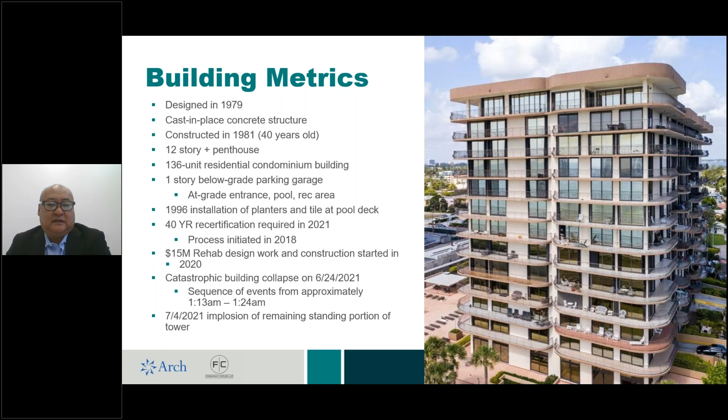You can change, next slide, please. This, well, go back one slide.

This is the building with the pool. The other picture didn't really show the pool, but you can see the pool deck to the left. And to the far left, you can see a new structure that was built, started in 2016. The significance of this structure next door will be understood later, but there was an allegation that the construction of the building next door, via installation of sheet piles, caused vibrations that could affect the Champlain Towers South building. That was actually never proven. There were no final reports indicating that was the case, but that was one of the theories of the cause of the collapse.

Next slide, please. The interesting thing about this project is that it was built in 1981, and there was a sister building built in 1982 called the Champlain Tower North. There was also another building built in 1994 called the Champlain Tower East, which is in between the two buildings. The 1982 Champlain Tower North building is very similar - you can see the footprint in the top right of my slide.

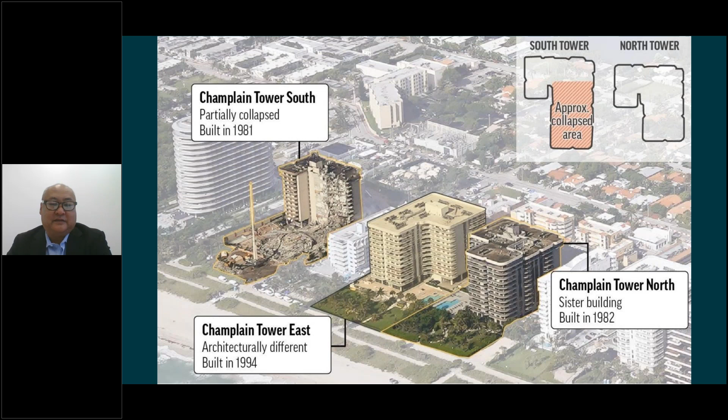So this is the building. There was basically a west tower and an east tower and the pool deck. The collapse occurred primarily in the area right where the pool deck is, and then the collapse occurred in the center between the west and the east towers. Eventually, the east tower collapsed sort of minutes later after the initial collapse.

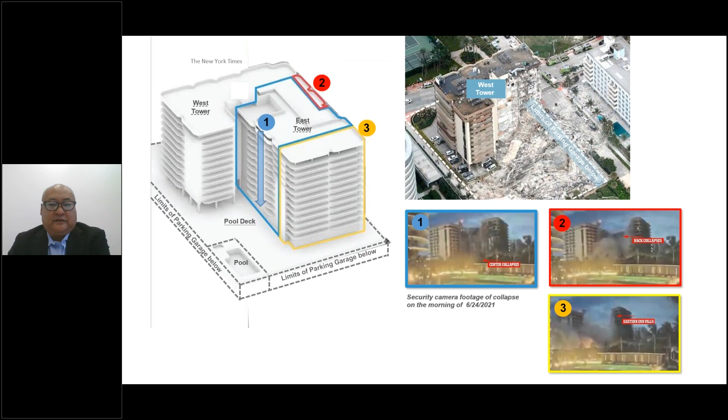I'm going to go through the information that we received through video. There was a security camera next door which actually has footage of the actual collapse. We took some video clips of it so you could see the mechanism. Essentially, the first part where you see number one, that's where the collapse began. You can see that in the second section in the back collapsed next, and then finally the third section of the east tower collapsed on top of the section that first collapsed. So that was the sequence of events with the collapse.

This is the slide that basically shows a model that was done. When I presented this before, we indicated the location of people who were actual witnesses who contacted the security desk and indicated to the security consultant or guard that they heard some construction. They were concerned about it. They thought maybe they heard some loud noises, felt vibrations.

This occurred, of course, at 1 in the morning. The collapse happened at 1:24 a.m. So at 1 a.m. in the morning, people are feeling something is going on. We'll show another video or picture of a person who was walking their dog at like 1 in the morning and actually saw something, which I'll show you in the next picture. But these witnesses are very important to the forensic people who were trying to determine the cause and what happened. The residents from room 111 actually, unfortunately, left their unit and moved to the security desk.

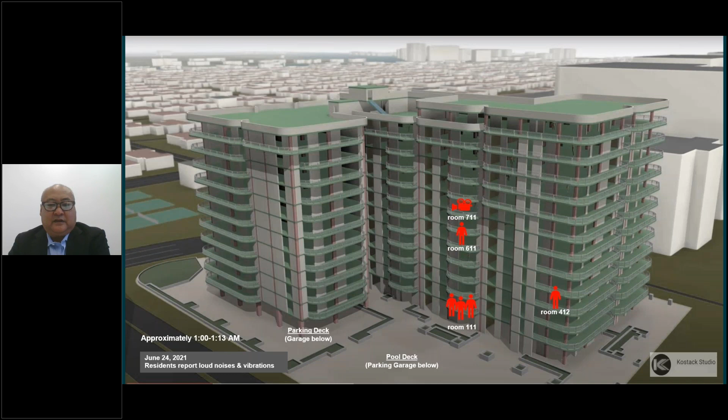The collapse, we understand, occurred right almost below room 111. There was also a condo camera in room 711 and 611, which we were able to get the video for. You can see the video pictures in room 711 in the top right, approximately at 1:15 a.m., about 7 minutes before the actual collapse. You can see that things are starting to move and rumble and change, and there were people who were obviously concerned.

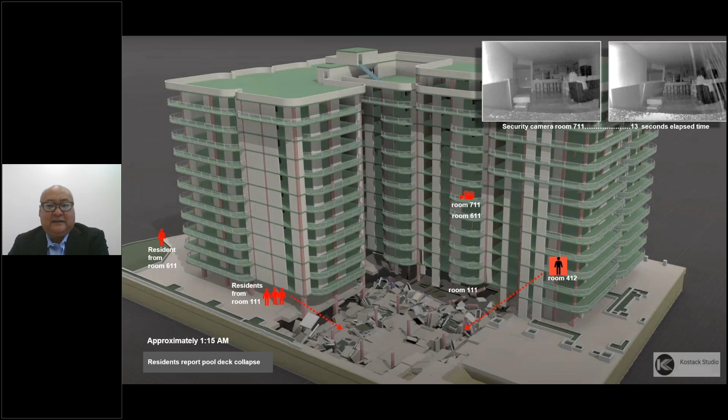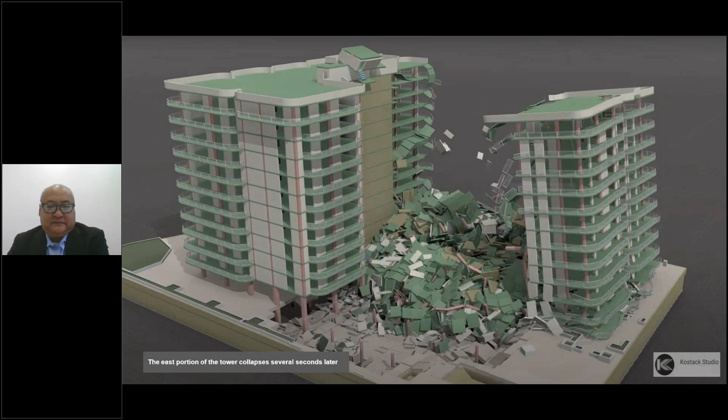When the collapse occurs at 1:22 a.m., it collapsed from the center. The pool deck had already collapsed first, and then the rest of the building went down afterwards. The section in the back goes down, and then the east tower collapses. This is an elapsed time of like 13 seconds, I believe.

So this is what it looked like the next day.

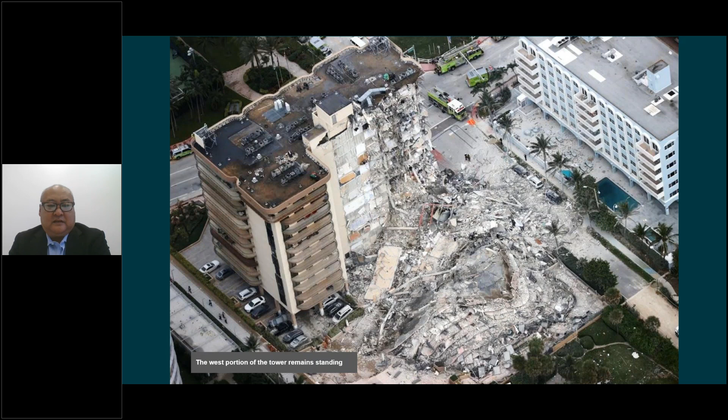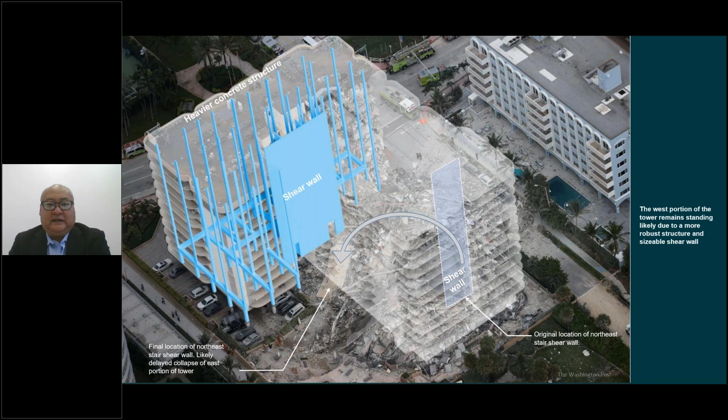When we looked at the building structurally, we noticed that there were two shear walls. The shear wall on the left side of the building is much more significant and substantial. It is probably the main reason why the west tower did not collapse during the collapse of the east tower. From the next photos, we'll show you where we think the collapse actually occurred. The witnesses found that the initial failure zone was on the pool deck, and we have some interesting photos.

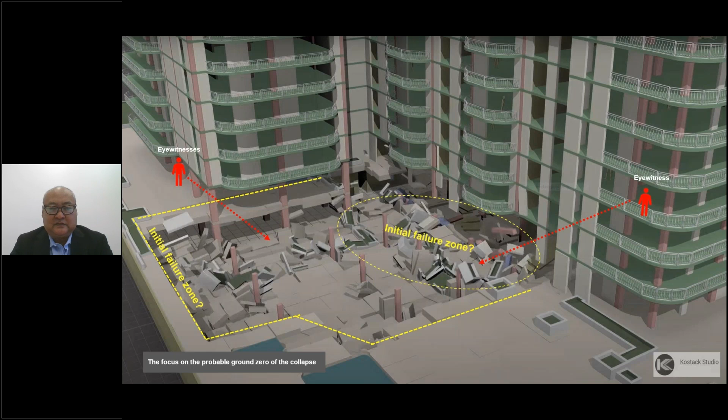So this is a diagram of the building underneath the parking garage. From all the photographic evidence and everything, we determined that this column M11.1 was probably the initial column that failed, and from there it actually took the rest of the building down.

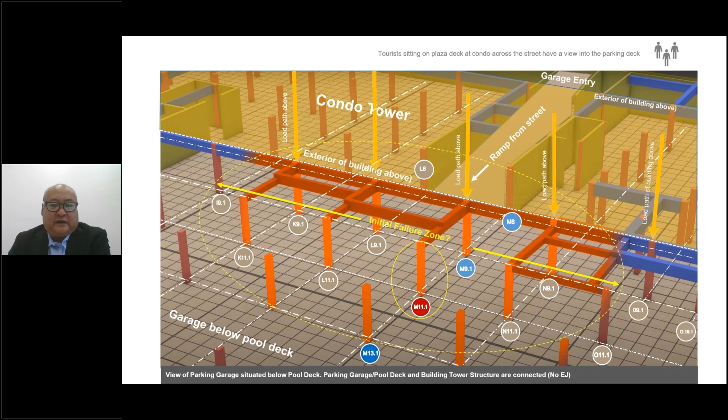If we go to the next slide, this is the parking garage from the street, and this is where the tourist basically films at about 1 a.m., 7 minutes prior to the building collapse. A person walking the dog took an actual photograph and video of some construction debris, and they also heard some loud noises in this area.

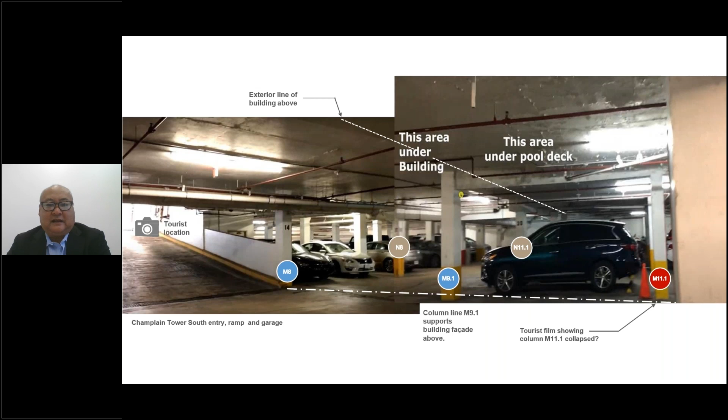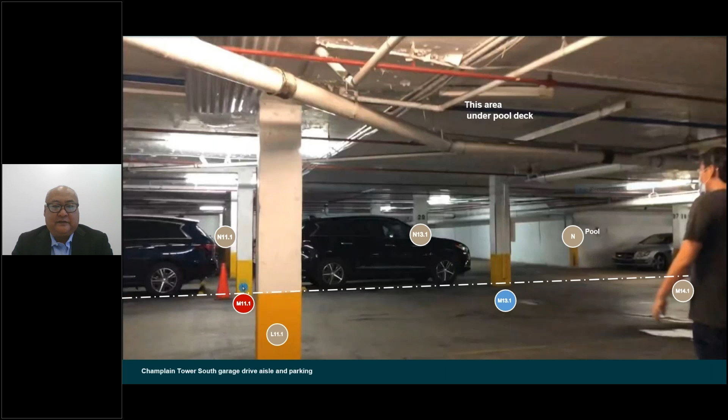If we go to the next slide, this is another view going down the ramp. You can see the column again on the left side, M11.1, which is the one we think collapsed first. This is all under the pool deck, which is just right above this location here.

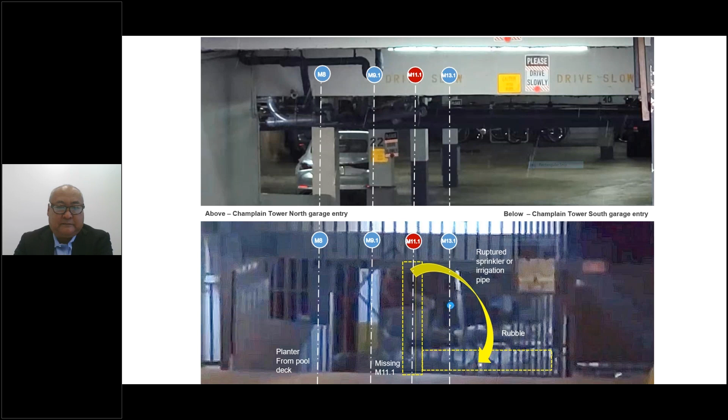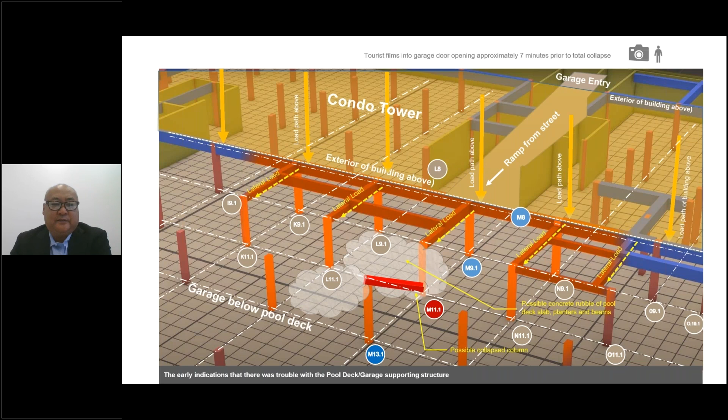As talked about before, the M11.1 column dropped first, and from there it created a domino effect where the loads proceeded to go down, and the building then collapsed on that side by the pool deck.

After a major collapse like this, there's an organization called NIST, the National Institute of Standards and Technology. They came in immediately and were working on a report to analyze the failure and perform invasive testing. They look at it from a number of different perspectives: they obtained the data, looked back at the building history, what were the codes, and looked at the evidence at the site. They had videos of the neighboring property and the tourists, which certainly helped them make their determinations.

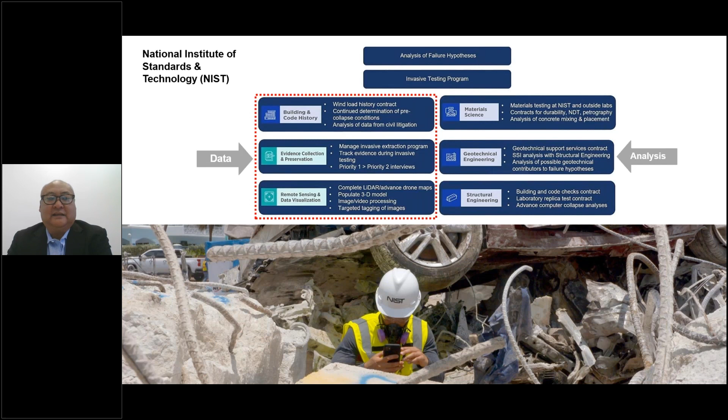From this, they performed an analysis and a report. The report has come out, and a lot of the things I'm talking about were found to be where the collapse occurred and how the collapse occurred. We're going to get into that next.

They were investigating almost 24 different possible causes. I talked about some of the causes in my initial discussion, like the neighboring property, the installation of the sheet piles. There was corrosion of the rebar caused by the pool deck, the pool leaking, and also the added weight of the planters on the pool deck. There were a number of other hypotheses and some final findings, but I'd like to take you through some of the photographs taken during the investigation, some from news reports and some from other forensic engineers.

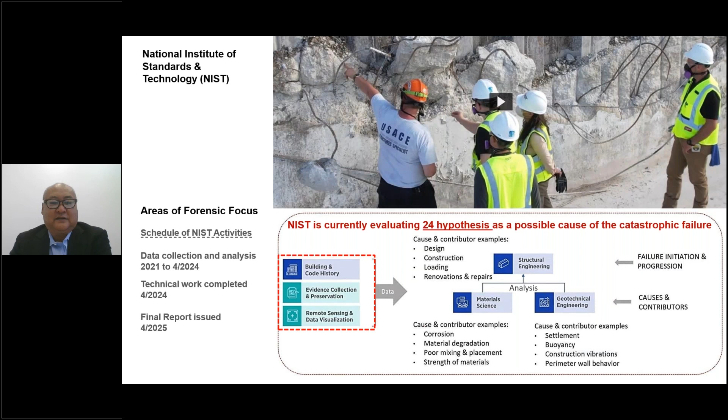The other note was that there may be missing rebar in the slab itself. So there was a concern, and I think ultimately there was a finding that the original design for the building was inadequate for the pool deck slab and the rebar for the columns connecting to the slab. This building was designed in 1980, built in 1981.

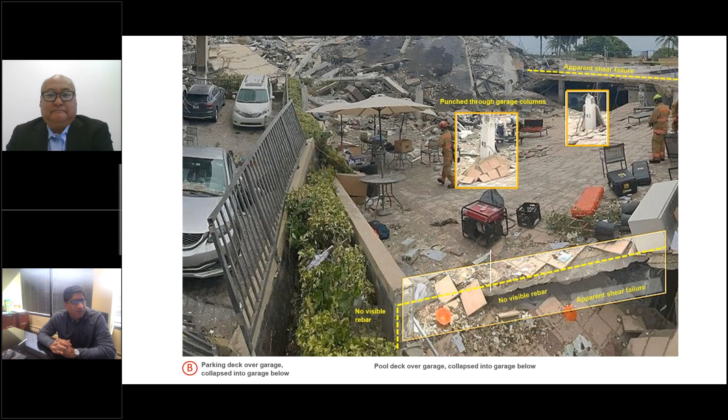Hey Bruce, while I have you here, we have a question that's come in. Bobak asked, if the water is from a ruptured sprinkler line, did the fire alarm trip? This should have been a signal of a serious problem and initiated a building evacuation. Any comments on that? Yeah, that's an interesting point.

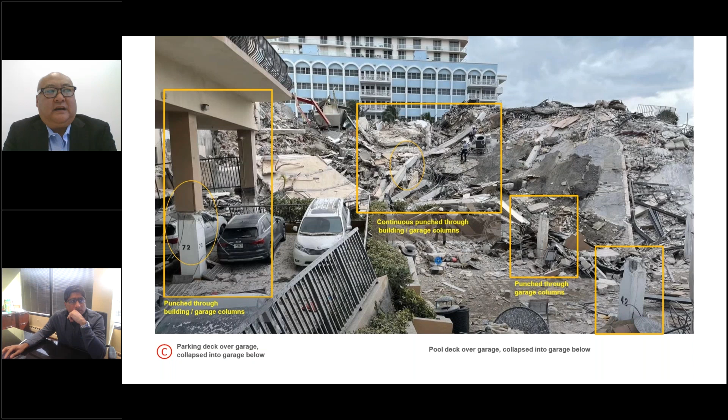If it was a fire sprinkler, you're right, I think there would have been an indication of a fire alarm triggering. I'll probably talk about this a little later when we get into the settlement and final resolution, you'll see where this becomes an interesting topic of discussion. I'm assuming it may not have been a sprinkler line because I don't think the fire alarm was triggered. I'm not 100% sure of that. I do know they called 911 because of the problems, but I'll get into what happened with the fire alarm system a little later.

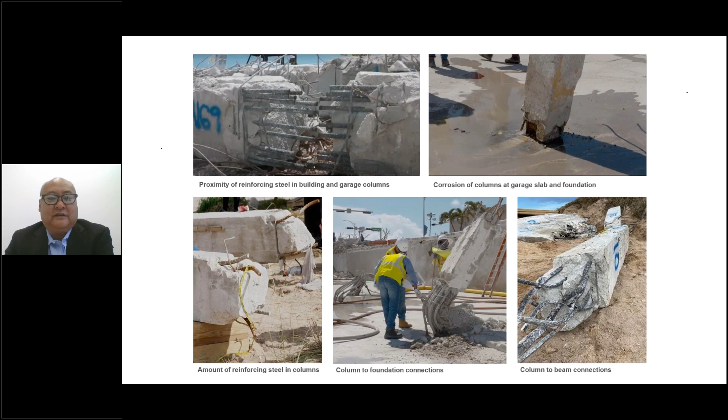These are photographs of the columns, and like I said, they found that the columns probably did not have sufficient rebar, especially in the pool deck connections. We can also see some corrosion in the columns and at the foundation. This is obviously on the water, it's a salty environment. There's also the pool leaking, which is a very significant problem, and it was leaking for years and years and years.

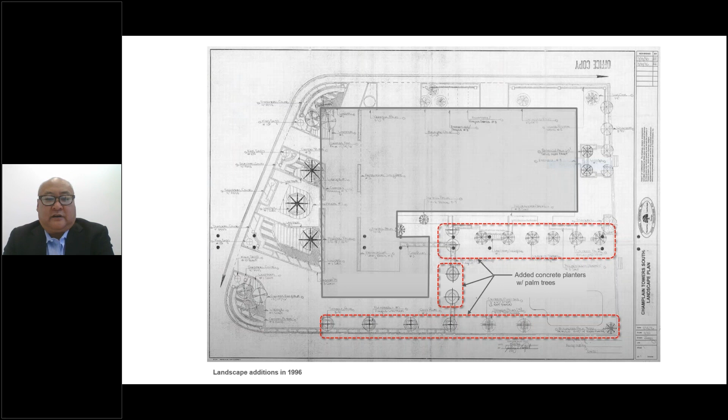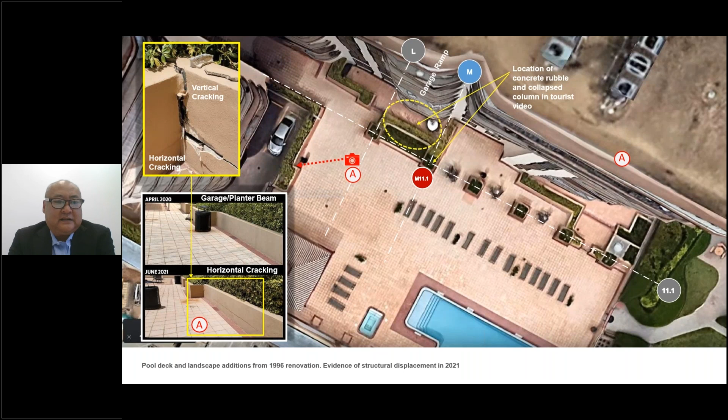This is an interesting photo - I think it was taken by a landscaper or somebody who was at the project and just happened to take these photographs.

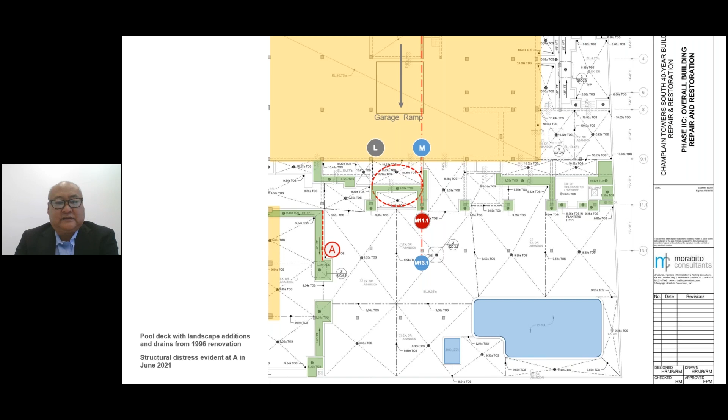I talked about where the mechanism was - there were some pool drains added in 1996. We talked about the distress shown where the A is in the circle - that's where the planter was, where you saw the significant cracking.

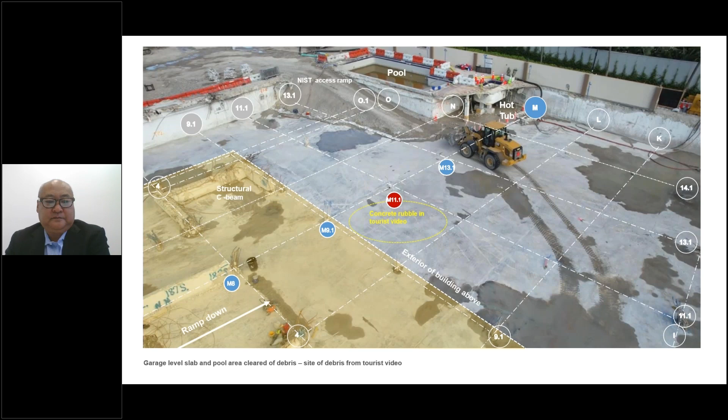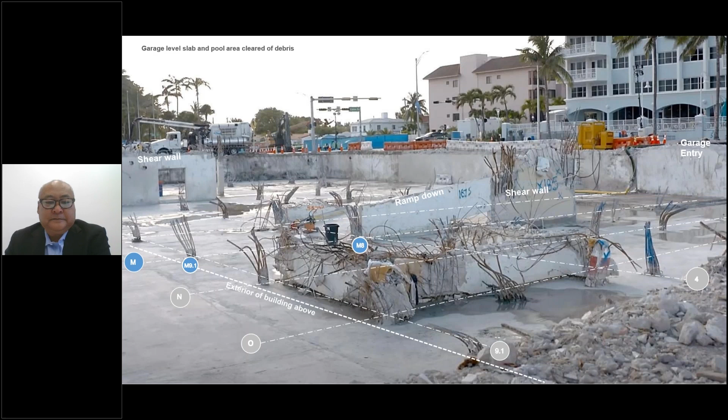So I talked a little bit about these issues that they were looking at, and I think that the report sort of gets to the final conclusions much faster than sort of talking about these hypotheses. But the next door building was Eighty Seven Park, and the reason why I bring it up is you'll see in the next slides basically what the outcome was in terms of the litigation.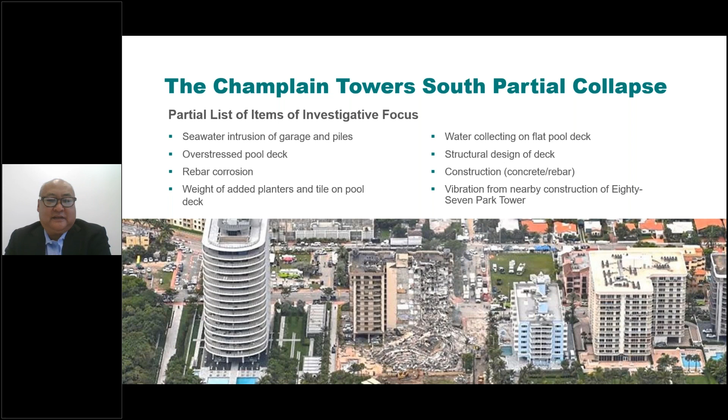This was part of the Morabito consultants report in 2018. They showed some indications of spalling columns. There was significant corrosion you can see in the ceilings, but this was not, to me, an indication of some imminent collapse or any problems that would have indicated that the building was going to collapse. So this report, while it does indicate there's some serious issues, there's also no indication of an imminent collapse. And as we know, the collapse did not occur for another 3 years.

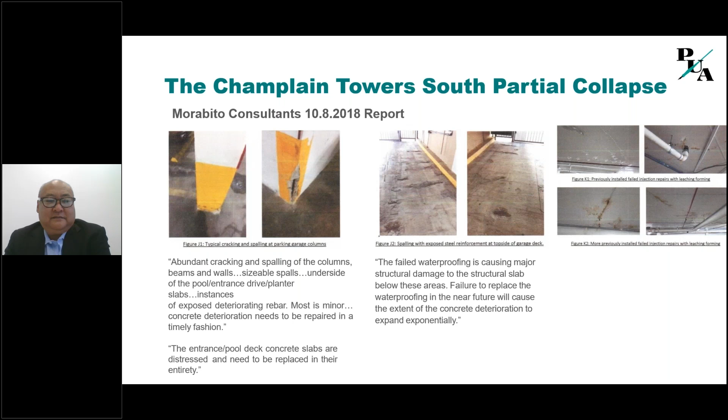These were photographs taken before the collapse, showing some spalling under some of the decks on the building and some more spalling concrete. We can go to the next slide.

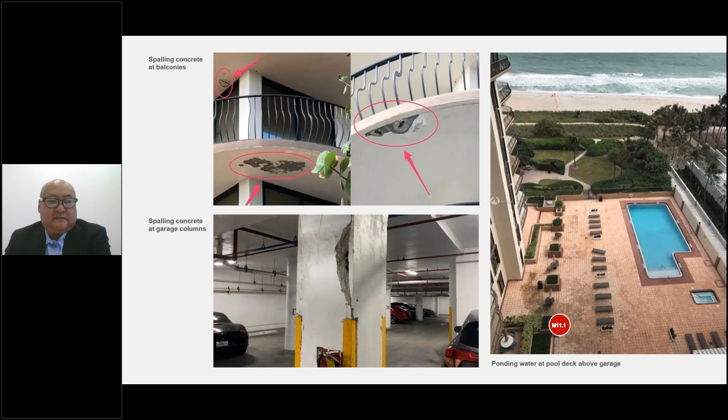This was one of the most horrific disasters that's ever occurred in the United States. The other sort of 3 or 4 major collapses - there was the 1922 Knickerbocker Theater in Washington D.C. that collapsed, killed 98 and injured 133. That was probably the most horrible collapse that we had.

These disasters, you have to understand, when you have a disaster, a lot of times reason and the whole litigation process sort of gets thrown out the door. And I think in this case, this is what happened for a lot of people who were involved in the litigation - it was basically a situation where anyone who touched the building, looked at the building, walked by the building, potentially thought they might have been the cause of the collapse. They ended up being dragged into litigation, even though if they were able to litigate the whole thing, they may not have been found to have been responsible at all for any of the issues that caused this collapse.

And the final report actually indicated that the collapse was a result of initially the design of the building being inadequate. And then over time, the corrosion from the pool, the added weight, those things were found to be the most significant causes of the incident. But can we go to the next slide?

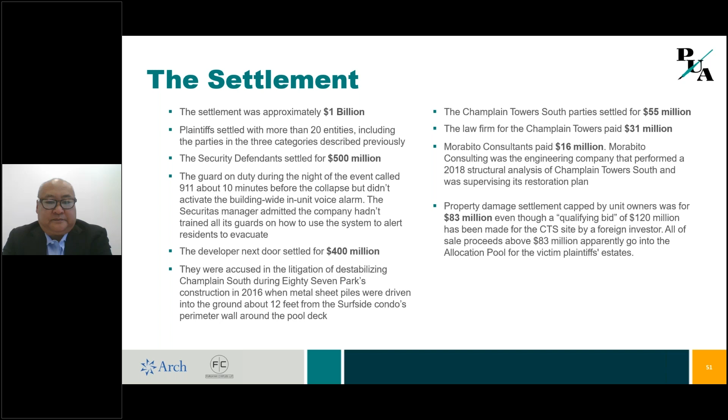So why was there no claim against the original design and construction team? In Florida, there was a 10-year statute of repose, which is different from the statute of limitations. A statute of repose basically means you cannot be sued after 10 years, no matter what. In most cases, it's a latent defect statute, so even if it's a latent defect, you can't be sued after 10 years.

So, for example, you could have a defect that shows up one year later, or four years later—you'd have to file a lawsuit within that time to avoid the statute of limitations. But if the 10-year statute of repose has already expired before that four years, the statute of repose will essentially trump the statute of limitations. Therefore, in Florida, they could not bring in the original designers, who were actually found to have under-designed the slab for this pool deck.

Other changes in Florida—when I presented this in front of AIA National last year, there was a building inspector from Florida who came up to me afterwards and talked about the changes they're actually implementing.

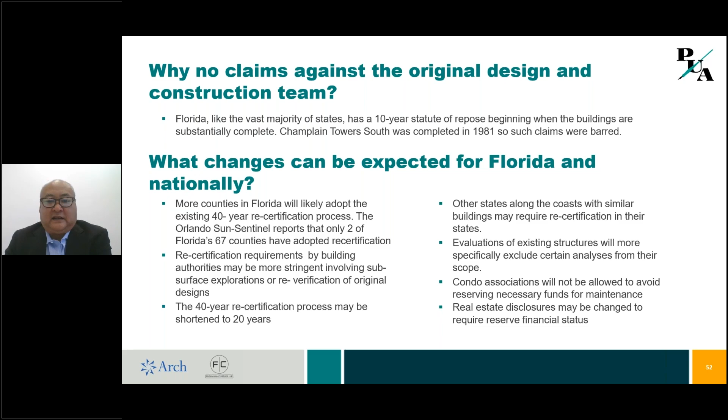I bring this up because in California we have a similar statute of repose, but the strange thing is that our statute of repose doesn't necessarily bar personal injury lawsuits. So there could be an argument that if this occurred in California, some of the original designers may have been brought back into the litigation.

There are also indications in some states where, after collapses, the legislature will go back and change the statute for certain types of structures or bridges, so they can bring in the companies that designed these inadequate buildings 40 years ago. So there's quite a few crazy things that can happen, but that's just something to keep in mind.

So I talked a little bit about the changes. They've implemented quite a few changes, and those changes seem to be working for them. There hasn't obviously been any other collapses.

They shut down 2 or 3 other buildings within 30 days of this collapse because they found problems with the building itself. The collapse, unfortunately—or if there's any fortunate part—did raise awareness, and there were quite a few changes made to the codes, inspections, and certifications in Florida and elsewhere.

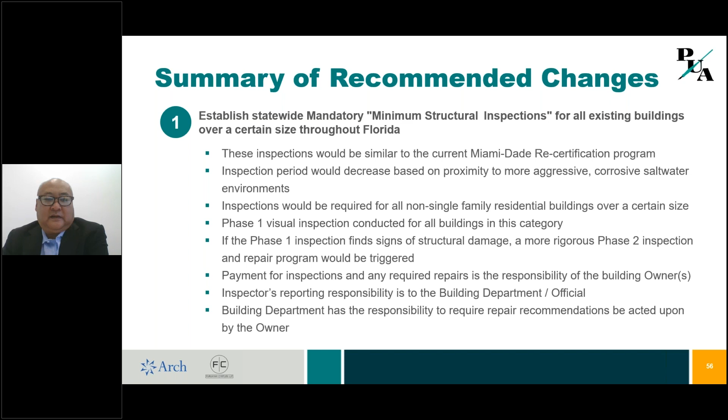I think I've summarized these findings, so I'm not going to read through the whole thing, but I think the problem was that the original design work for the pool deck slab was just completely inadequate.

But despite the fact that it was inadequate and not up to code, the building stood for 40 years. Even after placing things like planters on it, which weren't accounted for in the original design, the slab did not collapse until 40 years after it was built. You can point to vibrations next door, or corrosion from the pool leaking—all these things sort of added and compounded for the final collapse of this building.

But with these types of disasters, it's really hard to come back and figure out what really happened, and why this building collapsed at that time or on that day, while a building built a year later, exactly the same or similar, is still standing today with no other problems.

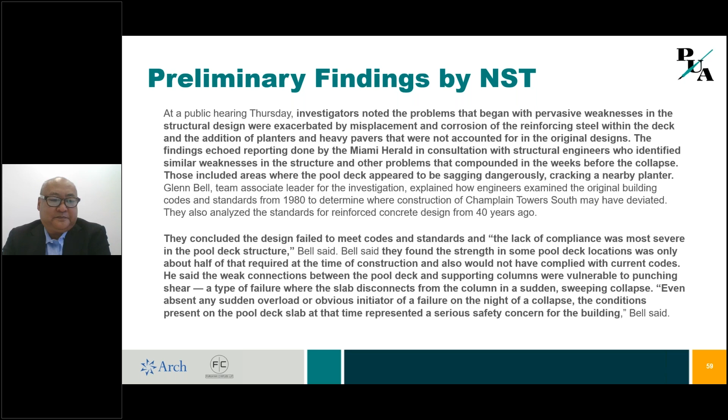This sounds insane, but because of collapses like this, you think about buildings you worked on, and what happens if this happens—you have to start preparing yourself, in some degree, for a potential crisis. What do you need to do? How are you going to handle it? What are you going to do if it happens? That's something to think about and keep in mind.

I think if you're doing evaluations of buildings or structures, be very specific and clear on what you're looking at and what you're not evaluating. In this case, people did not look at the original design. If they had, they may have found that the design was inadequate for the pool slab.

Be specific on what you did not evaluate and what that means—for example, you're not doing invasive testing, you're not x-raying the rebar to analyze it or determine how corroded it was. You can only see the rebar where concrete has spalled, you can only see rust stains, you can only see so much. So be very specific about what you did see, what you did not see, and what you can evaluate.

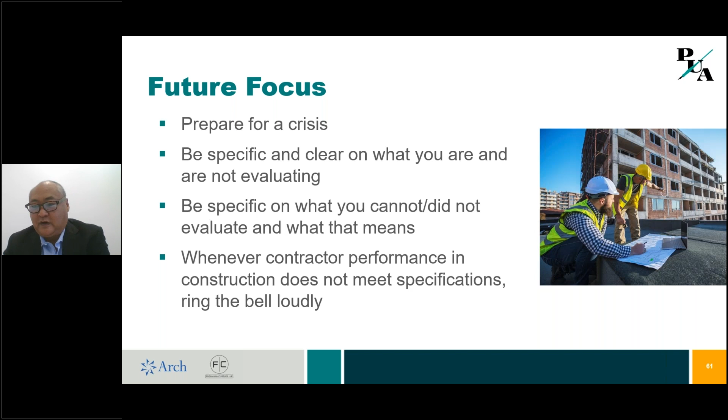We've got a question from Andres. He said, I thought it was 7 years now for the statute of limitations. Well, it depends on your state. I'm not trying to say that 10 years is the statute of repose for every state. There's some states that are 7, some more, some less. California is 10 years for statute of repose, 4 years for a patent defect, and 3 years if you're aware of a problem. So 2 years for personal injury in California. I don't know what state this person is from, but it may be 7 years in that state.

Next question is from Maria. Was the penthouse added after the original construction? Yes, it was added, and it was an issue because it sort of violated the height restrictions, or it was problematic because it did increase the height of the building and livable space of the building. So I think that was an issue, and it may have added weight to the building, because I don't believe there's a penthouse on the other north building.